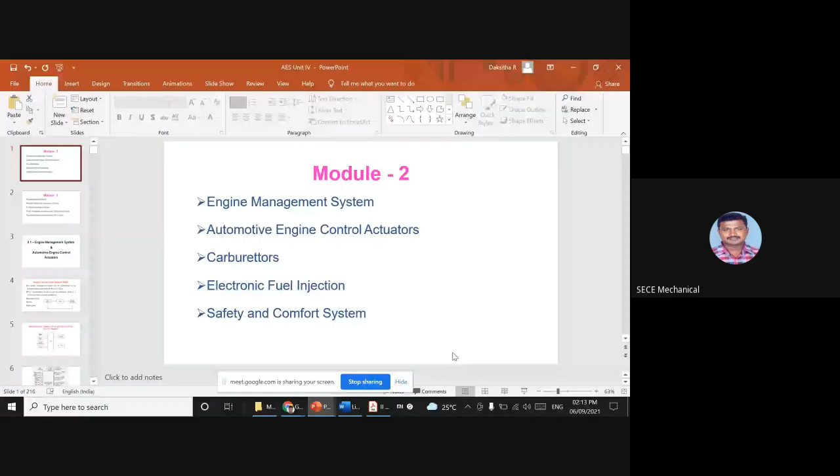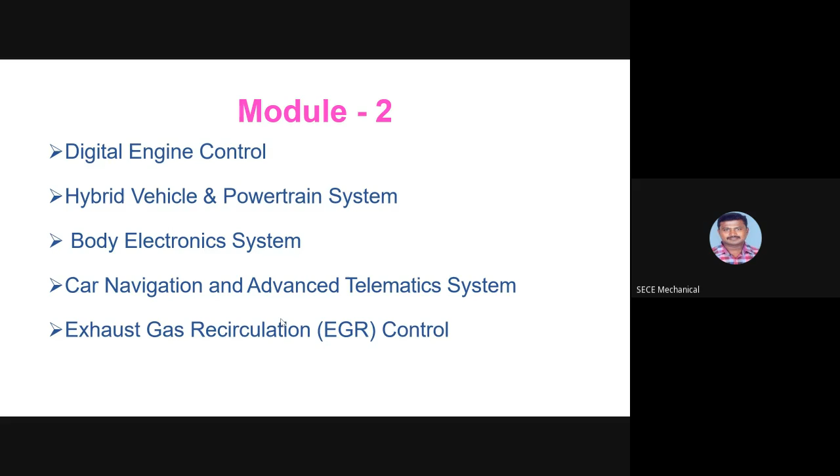Okay, guys. Today we are going to enter into Unit 4. In Unit 4, we are going to discuss the engine management system. So today we are going to get to know your engine management system: the engine management system, automotive engine control actuators, the electronic fuel injection system, the digital engine control system, car navigation and advanced telematic systems, and the exhaust gas recirculation system. Now let us enter into the engine management system.

Okay, nowadays almost 99.99% of cars, every car, is equipped with an ECU, electronic control unit. This electronic control unit plays a major role in controlling the activities carried out in the engine of all automotive vehicles. All the functioning is monitored, and whenever any change is required, this electronic control unit gives commands or orders to the actuators, so that will control the functioning

of the cars. Okay, so the engine management system is one of the smartest systems in today's vehicles, because it controls each and everything in your car or in all automotive vehicles. After all, it is responsible for the entire combustion process and mixing the right air-fuel ratio entering the engine, as well as igniting the compressed air-fuel mixture in the cylinder at the right time.

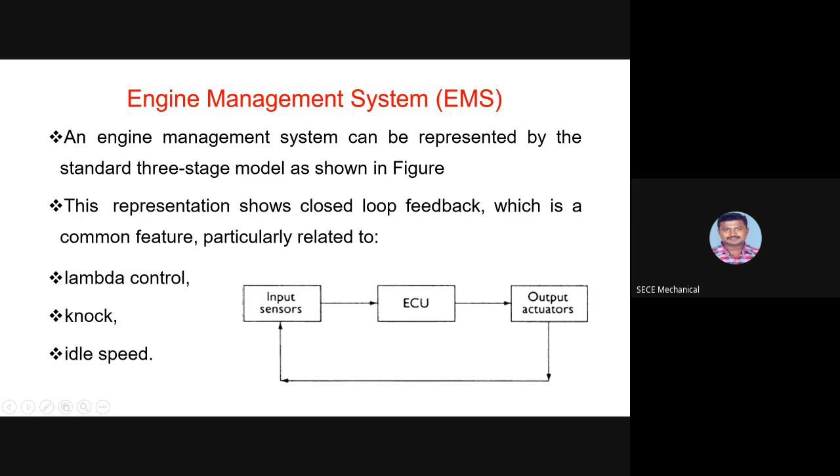So lambda control, knock, idle speed and everything. So this is the general block diagram of an ignition and fuel control system.

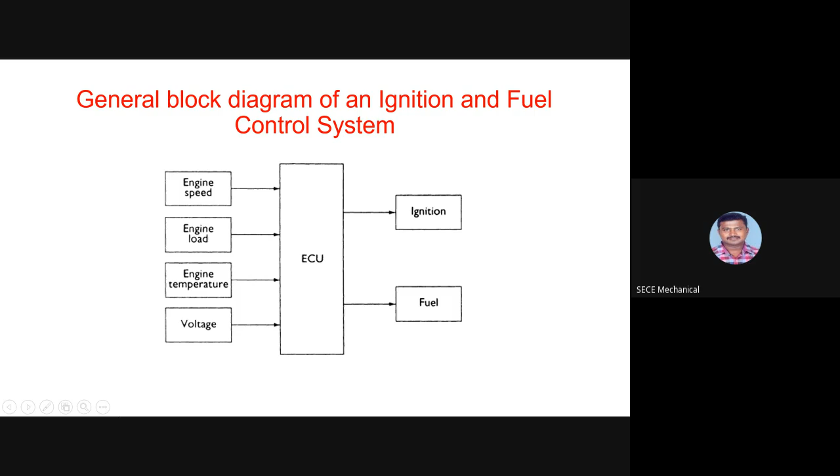In this, on the left side you can see the different types of sensors attached to the engine and in and around the car to monitor the functioning of the car or any kind of automotive vehicle. So here many of the sensors are related to IC engines. So this is going to monitor the IC engines. That is shown in this picture. So you can see the different types of sensors.

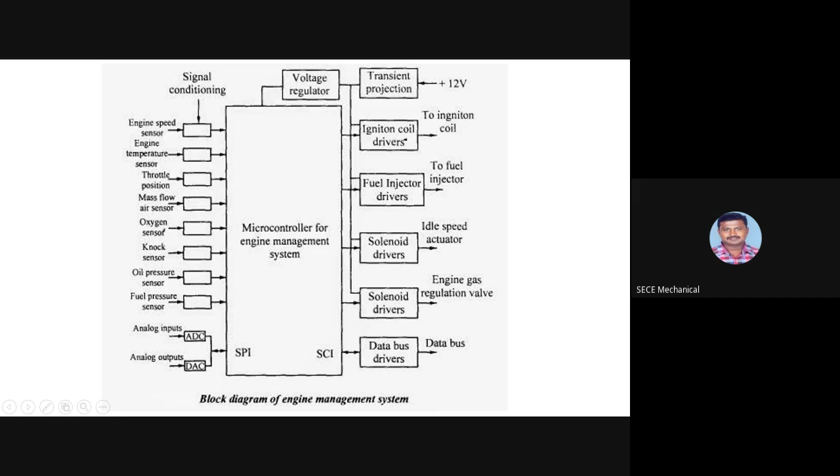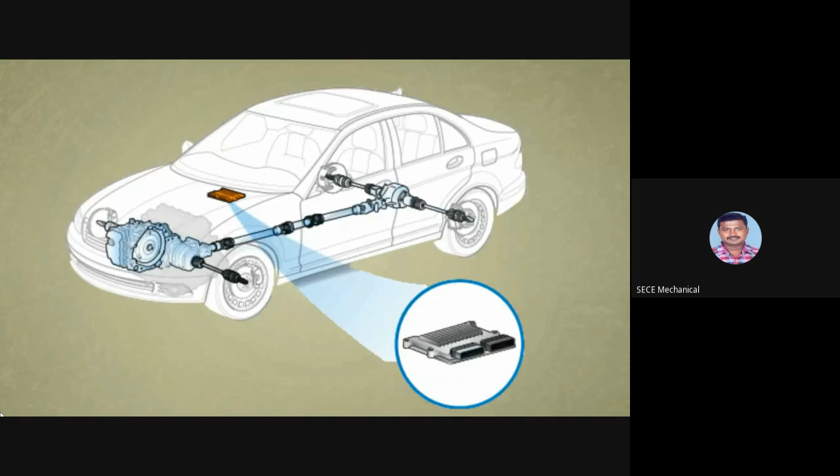Hello viewers. Let's talk about engine control module and its requirement in vehicles. Basically, engine control module is known as powertrain control module or engine control unit. So what does the ECM do? The main function of this controller is to get information from sensors and run certain actuators. The vehicle computer uses these inputs to adjust its settings so the vehicle can run in accordance with your driving habit. Let's know about the connecting sensors, which are playing the important role in ECM.

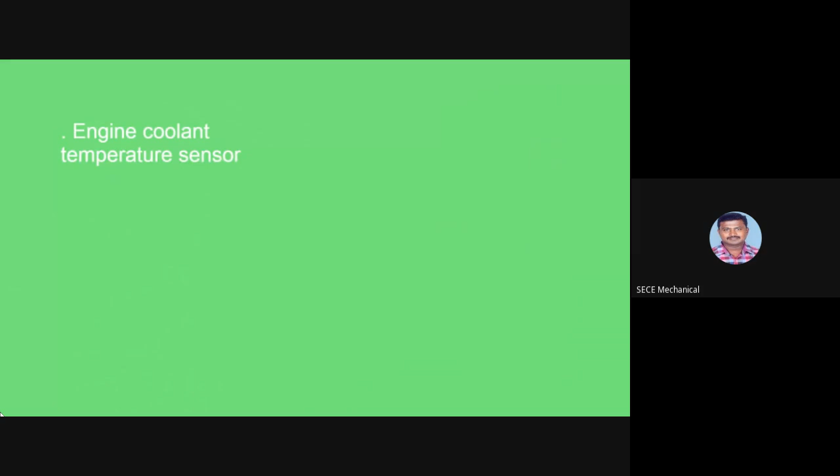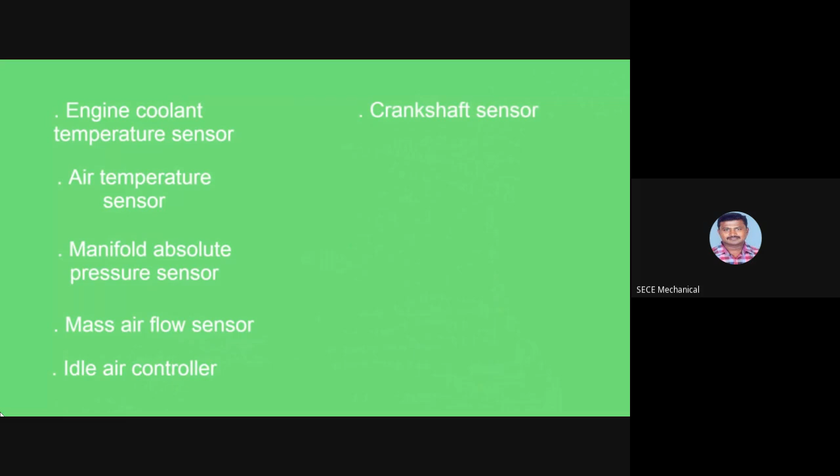Engine coolant temperature sensor, air temperature sensor, manifold absolute pressure sensor, mass airflow sensor, idle air controller, crankshaft sensor, camshaft sensor, throttle position sensor, oxygen sensor, Knock sensor.

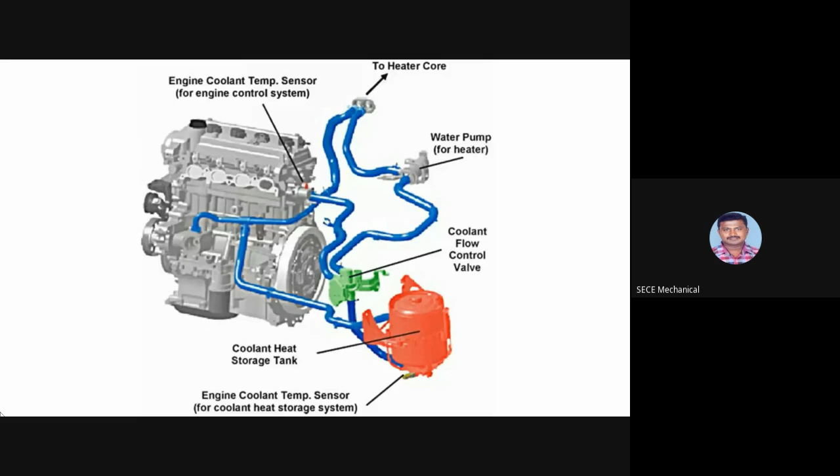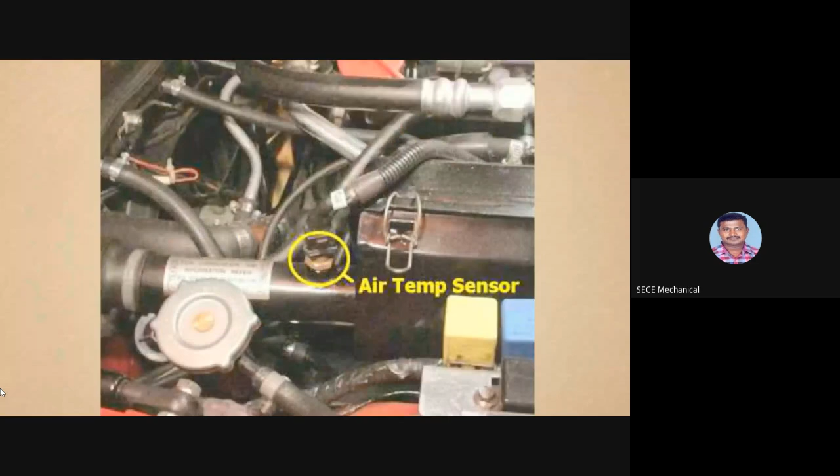Engine coolant temperature sensor. Its function is to instruct the radiator fan to turn on and cool down the liquid after getting temperature above 75 degrees. It is usually located at the bottom of the radiator or top radiator hose towards the engine block. Air temperature sensor. Air temperature sensor monitors the temperature of air entering into the engine. The ECM needs this information to estimate the air density and can prepare a balanced air mixture. It is usually located in the air filter box or pipe that is attached to the air filter box.

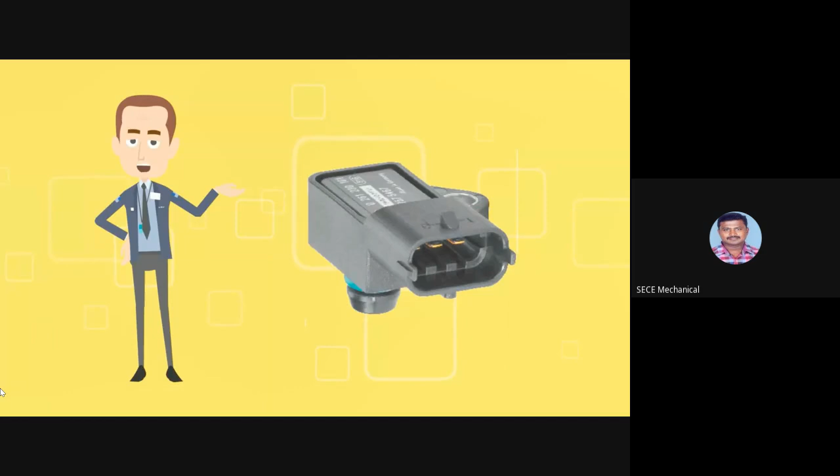Manifold absolute pressure sensor. This sensor is a key sensor because it senses the engine load. This sensor measures air pressure, which tells ECM the current altitude of the vehicle. With the help of this information, ECM can adjust the ignition timing and fuel enrichment. It is bolted on the intake manifold or linked with a vacuum pipe from the intake manifold.

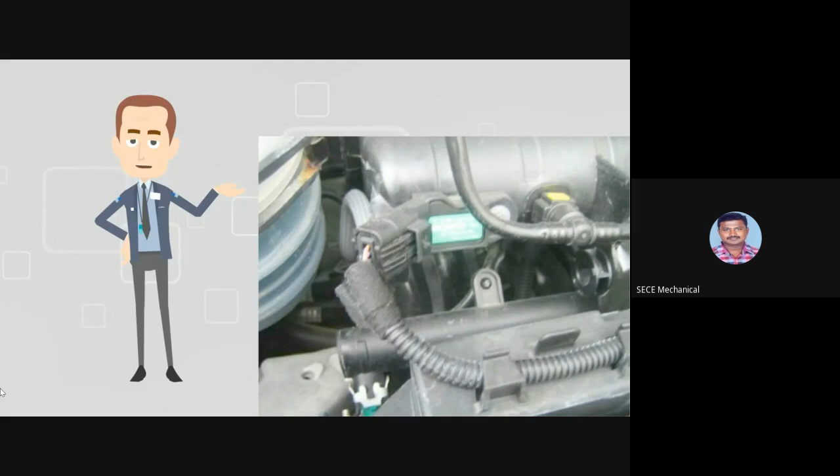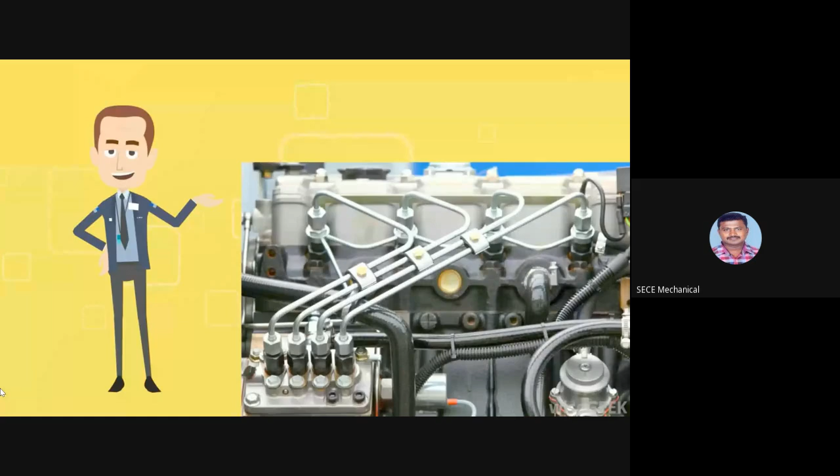Mass airflow sensor. This type of sensor measures the volume of air entering into the engine. Actually, this information helps the ECM to balance and deliver the correct fuel mass to the engine. It produces more current to keep temperature required by the manufacturer. It is located on the air cleaner box. Idle air controller. It works to keep RPM of engine steady. It is an actuator, not a sensor. It increases the RPM of car until the coolant temperature sensor indicates the high engine temperature.

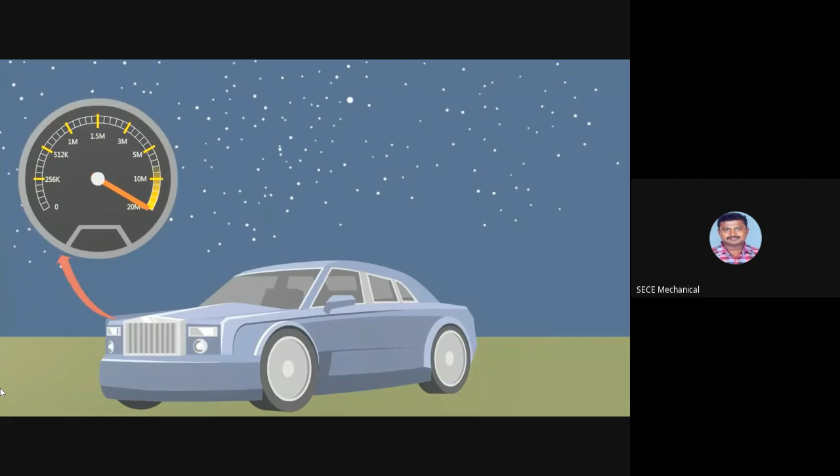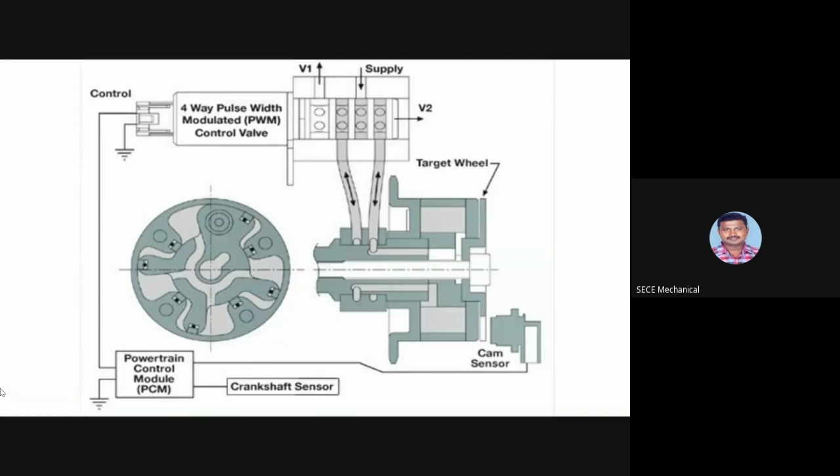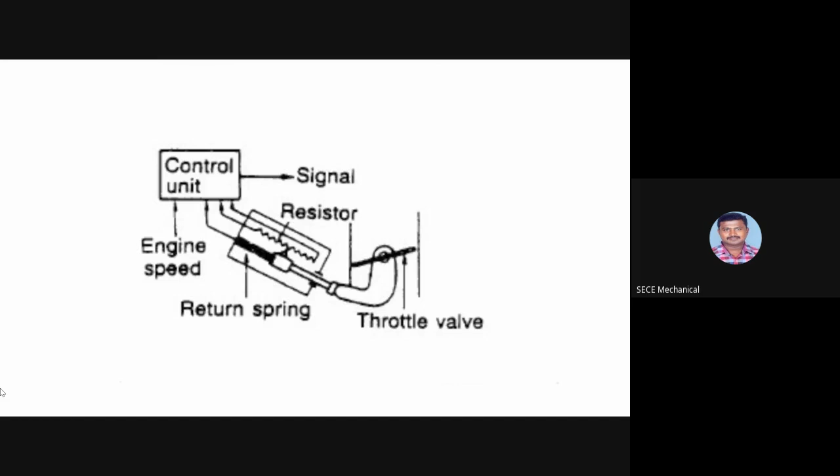Crankshaft sensor. It monitors the position and rotational speed of the crankshaft, and this information is important for ECM to control ignition system timing. Camshaft sensor. It is an electromagnetic sensor which produces voltage when a metal object moves past it. The sensor contacts with ECM for position of camshaft. It is fixed at the end of camshaft. Throttle position sensor. This sensor is linked with accelerator pedal, and the throttle body sends information about injector pulse width and spark timing. It is located in throttle body and it is neither washable nor repairable.

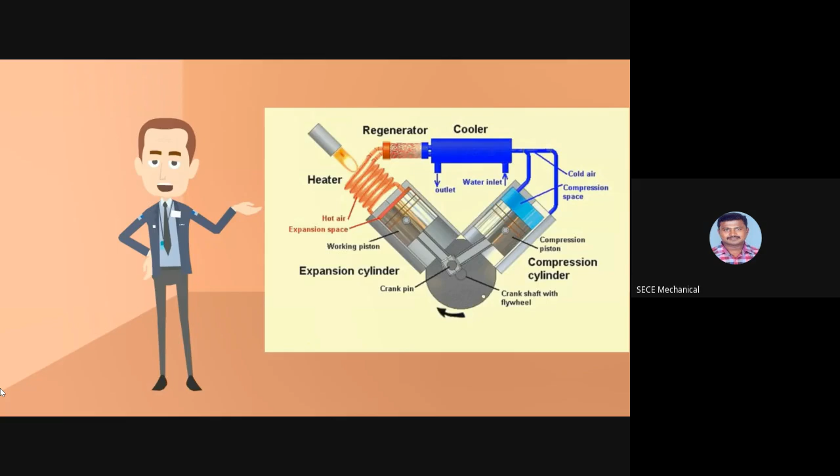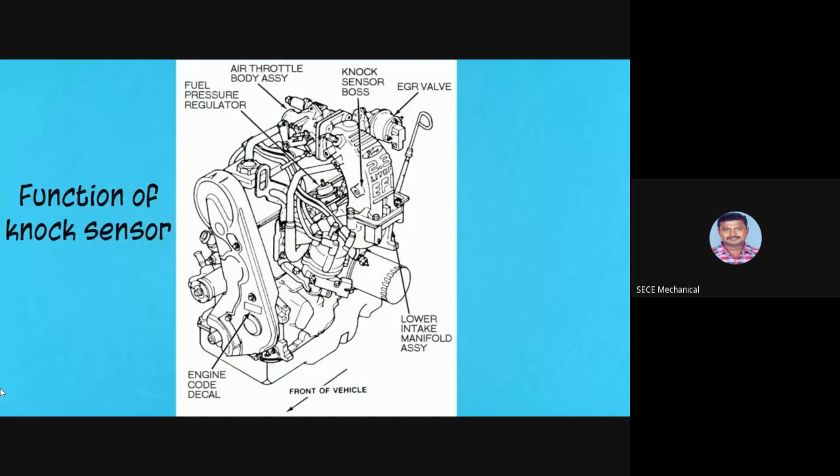Oxygen sensor. It measures the proportion of oxygen in fuel and the amount of fuel consumed by the engine. There are two types of oxygen sensors. One is zirconia and another one is titania. Knock sensor. This sensor contains a crystal that detects mechanical stress and produces a voltage when the car knocks. It also allows different grade fuel without any type of engine problem, and it is fixed in engine body. These are the sensor details.

But question is, what happens when any sensor fails? Well, sometimes sensors simply don't work. So don't forget to repair it. Make sure to repair it or replace it with a new one for better performance.

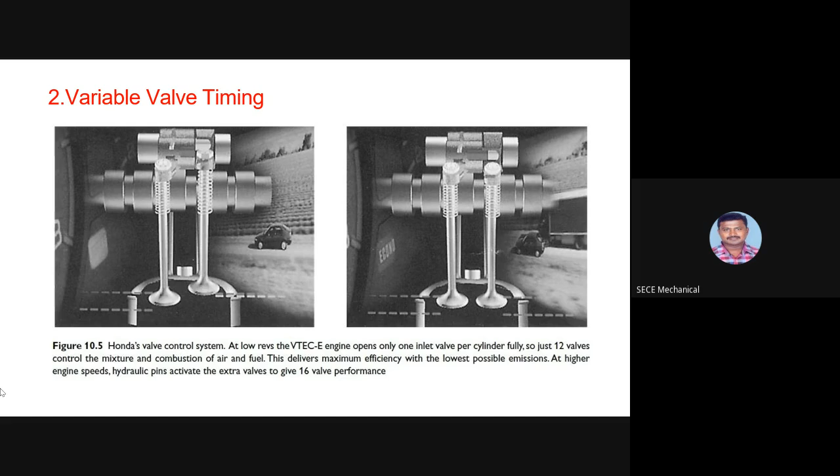During the engine's highest speeds, hydraulic pins activate the extra valves to give 16 valve performance. Depending on the number of cylinders used in our IC engines, the valves are located for each cylinder, and this is not related to hour timing.

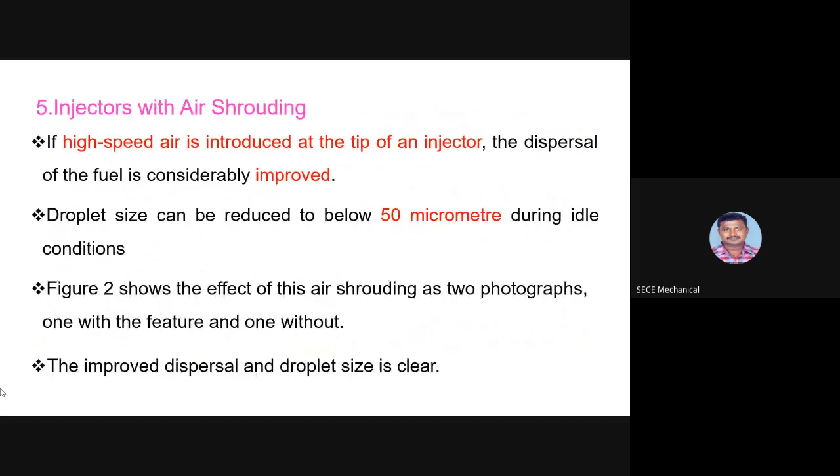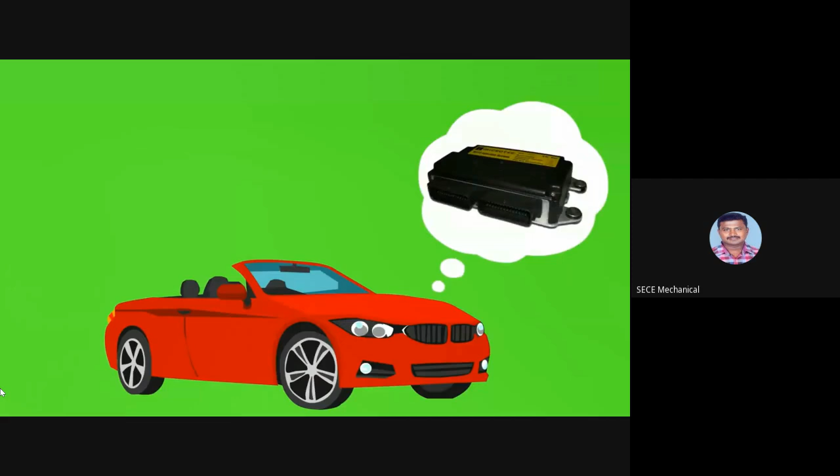Have you heard about the recent technology incorporated in the automotive sector? That is called EMS, Engine Management System. EMS is a type of electronic control unit that controls the running of an engine by monitoring engine speed and ensuring optimal engine performance.

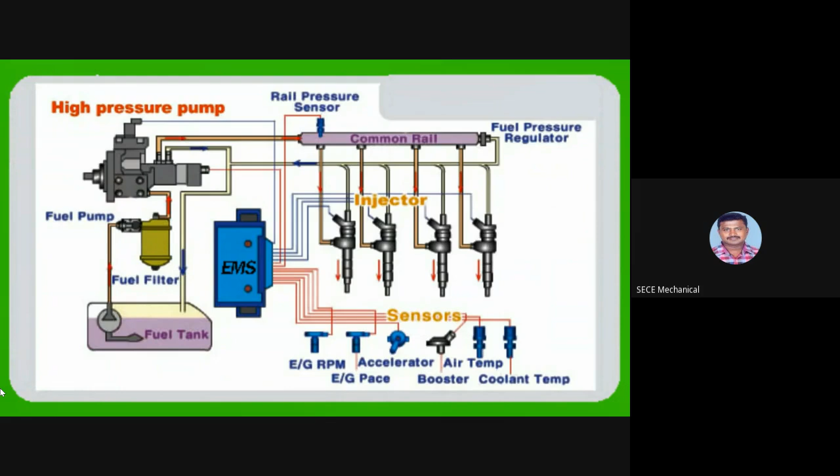Technically, the engine management system is responsible for controlling the amount of fuel being injected and for adjusting the ignition timing. Optimum functioning of the EMS assures maximum engine power, with the lowest exhaust emissions and lowest fuel consumption. It measures the exact quantity of fuel required to start an engine.

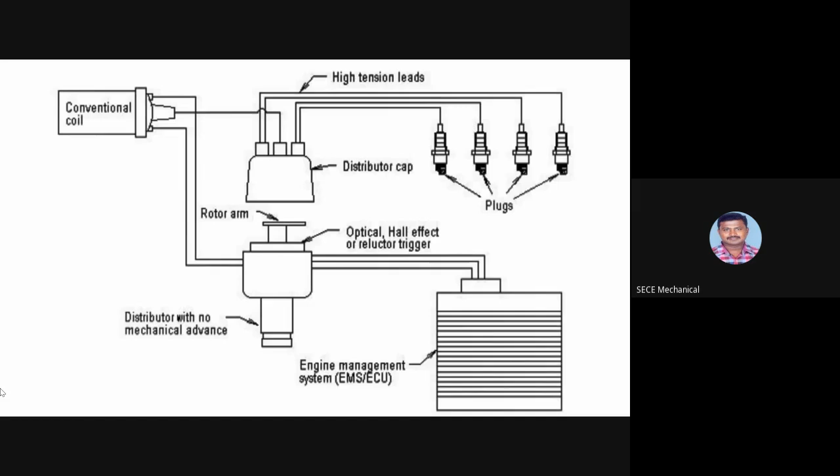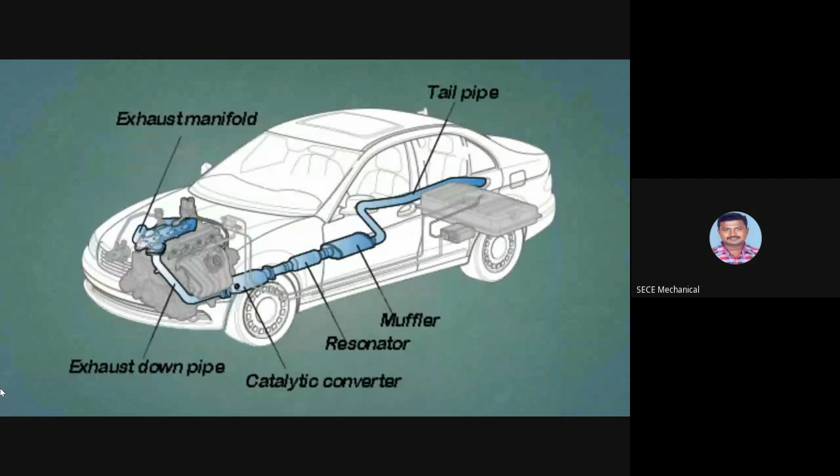Why does a car need an engine management system? It is required to manage the powertrain inside the engine, and it also helps maintain proper coordination with the engine's ignition system, fuel injection system, and emission control. In short, it maintains the right coordination within the engine parts so that it gives better output.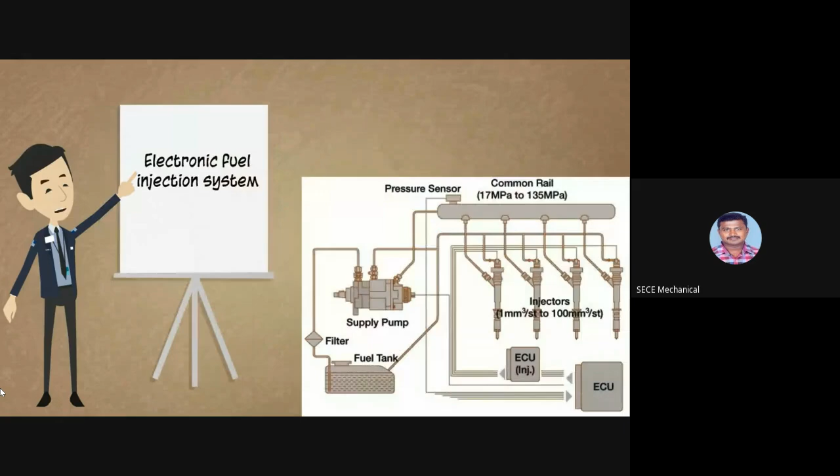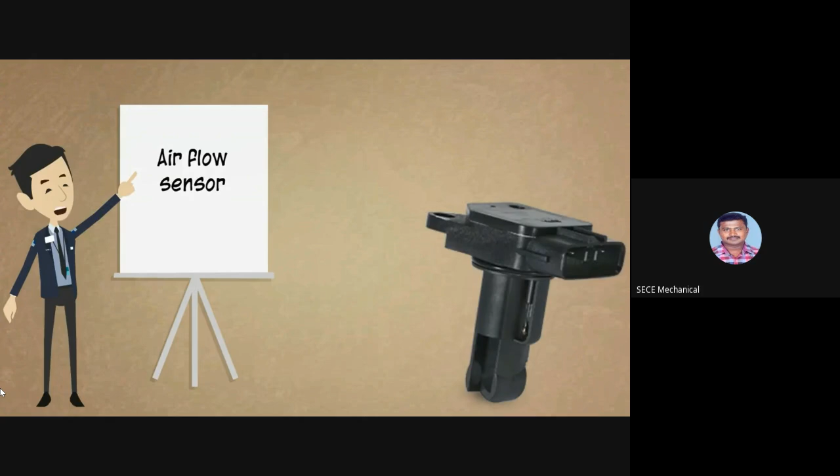Let's discuss the key parts: electronic fuel injection system, air induction system, fuel delivery system, electronic control system, electronic control unit, fuel injector sequential, airflow sensor, air temperature sensor, throttle position sensor, temperature sensor, oxygen sensor, idle air control valve, MAP sensor, knock sensor, engine speed sensor, engine oil sensor, crankshaft sensor, camshaft sensor, and multi-point fuel injection.

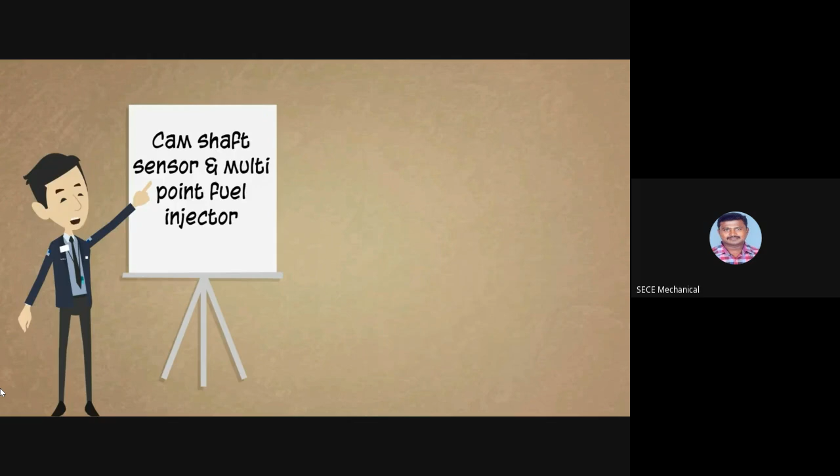First, the electronic fuel injection system. This is the primary fuel delivery system which determines the amount of fuel to be injected into the engine and when to fire the spark plugs. This information helps the engine achieve the most horsepower with the least amount of fuel.

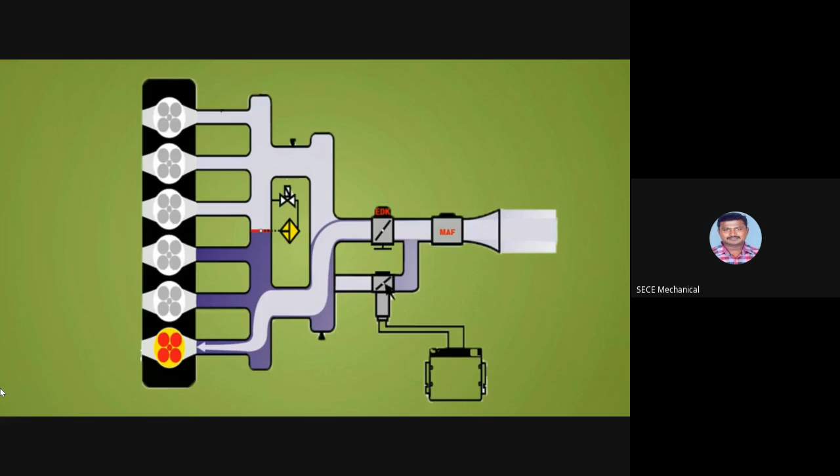The air induction system's purpose is to filter, meter, and measure airflow into the engine. The fuel delivery system helps inject the correct and precise amount of fuel in the intake manifold. It measures the exact fuel efficiency, emission performance, and engine tuning, etc.

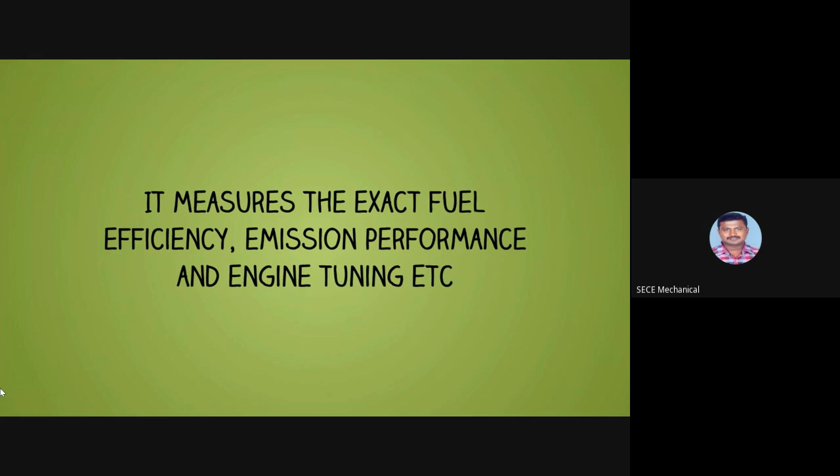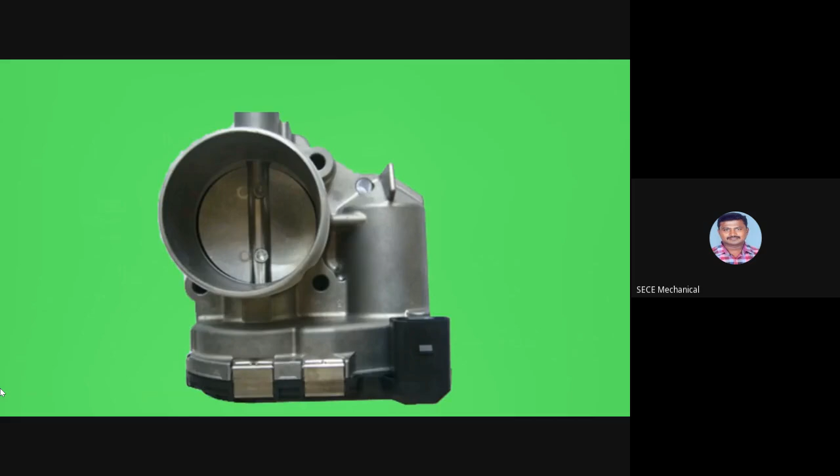The electronic control system's purpose is to detect air temperature, engine temperature, throttle valve opening angle, and the amount of air entering the air induction system, etc. The system controls the correct amount of fuel to be injected and the proper time at which the fuel is injected, at any speed and load condition.

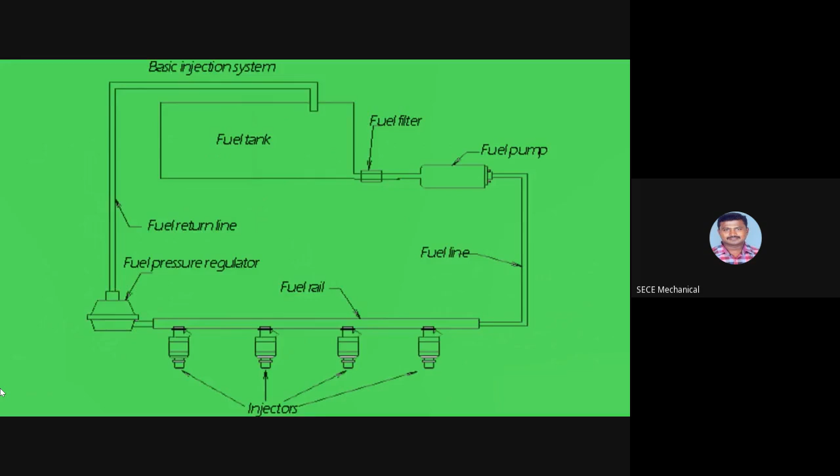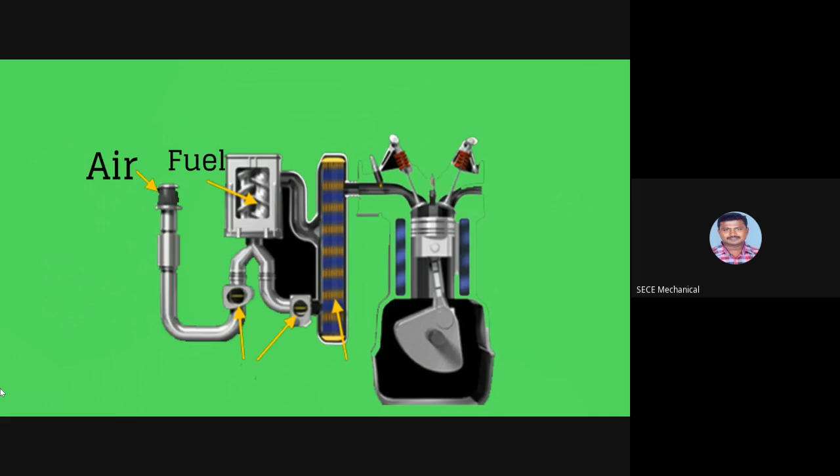The electronic control unit serves as the control center for all the sensors on a car. It controls more than one electric system and subsystem in a motor vehicle, which is why it helps regulate and maintain the amount of fuel and air needed by the engine to increase horsepower. Fuel injector sequential is a type of multi-port injection system.

In this fuel injector sequential system, the injection valve opens just before the cylinder's intake valve opens. It has a fast response time when the driver makes a quick change while driving.

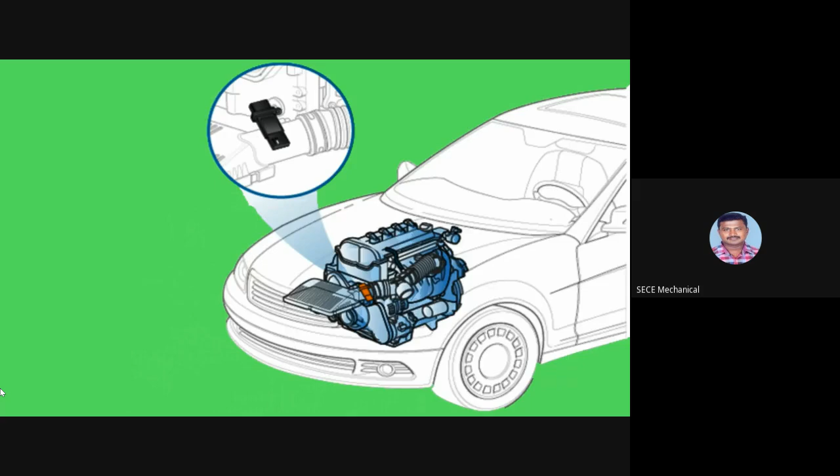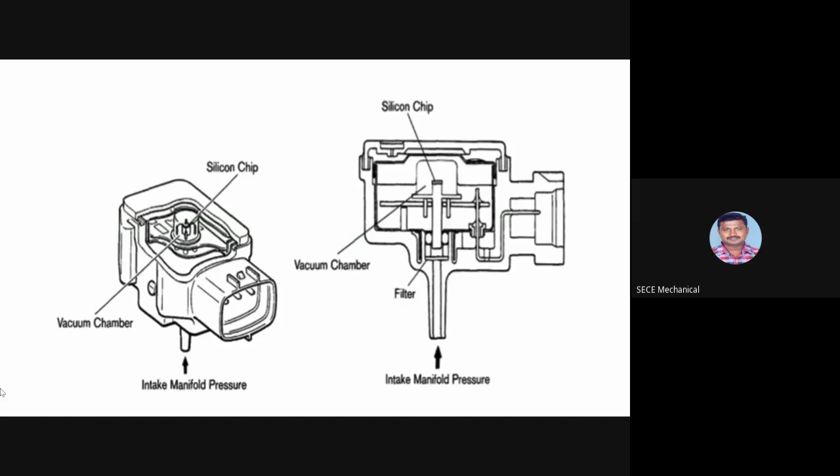An airflow sensor is a device that measures the actual speed of air flowing through the engine in different segments. Generally, it measures the mass of air flowing through the device per unit time. The air temperature sensor helps measure air density for fuel mixture control and to trim the airflow ratio according to the airflow density.

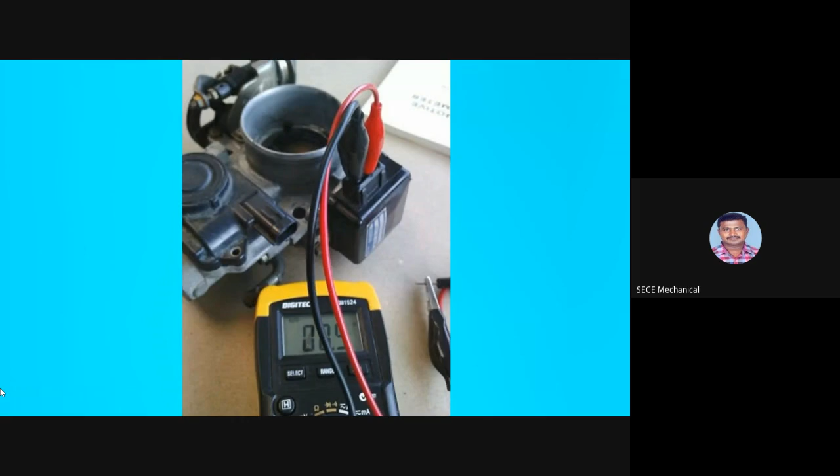Throttle position sensor. The sensor is used to monitor the throttle position of a car. It moves with the throttle and sends a voltage signal to the computer indicating throttle angle and speed of movement. The computer uses this data to measure engine load, adjust timing, fuel delivery, etc.

Temperature sensor. Temperature sensors include analog and digital sensor ICs designed for temperature monitoring of a system. Oxygen sensor measures the proportion of oxygen to fuel in the engine.

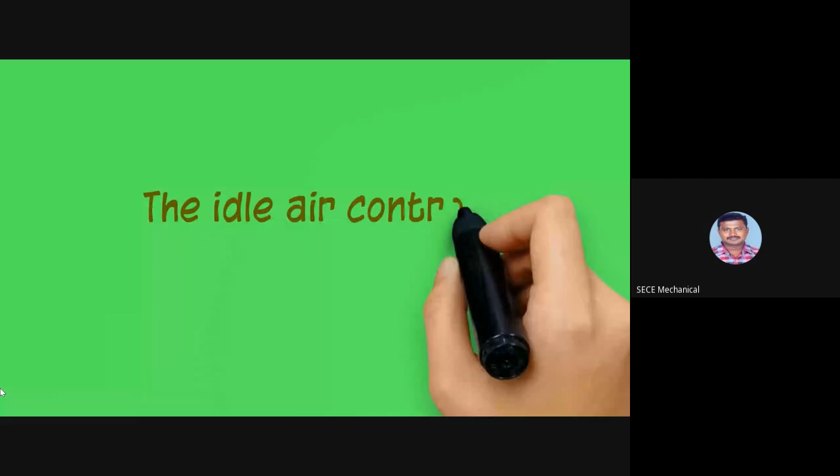The idle air control valve, also known as idle speed control valve, regulates the idle speed of the engine.

MAP sensor. This sensor measures air pressure, which shows engines the current altitude of a vehicle.

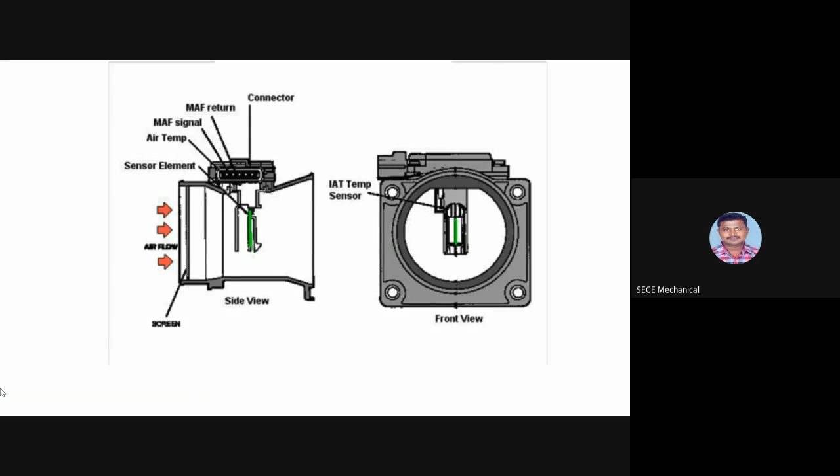knock sensor. The knock sensor detects engine knock and sends a voltage signal to the engine, and the engine uses that signal to control the timing.

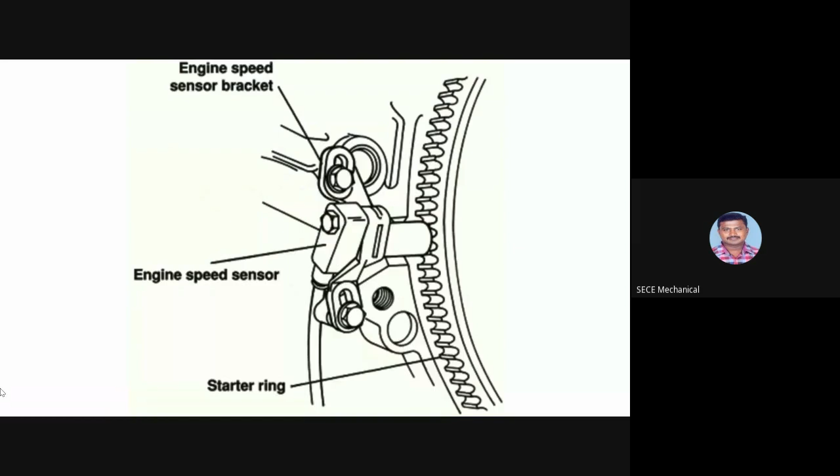Engine speed sensor. An engine speed sensor is attached to the crankshaft of a car's engine, and it indicates the speed that the crankshaft is spinning. This information is beneficial to control both the ignition timing and EMS.

Engine oil sensor measures the oil pressure inside the engine and gives an alert in case of any problem with oil pressure. Crankshaft sensor.

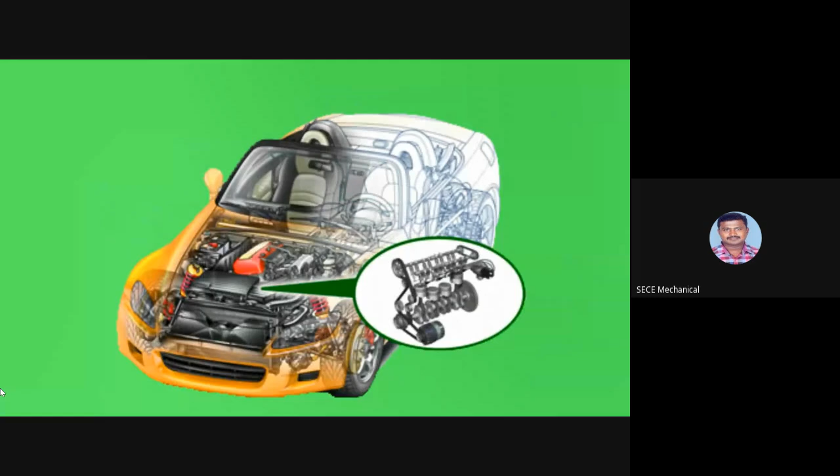It is used to monitor the position and rotational speed of the crankshaft, and this information will be used by the EMS to control the ignition system timing and other engine parameters.

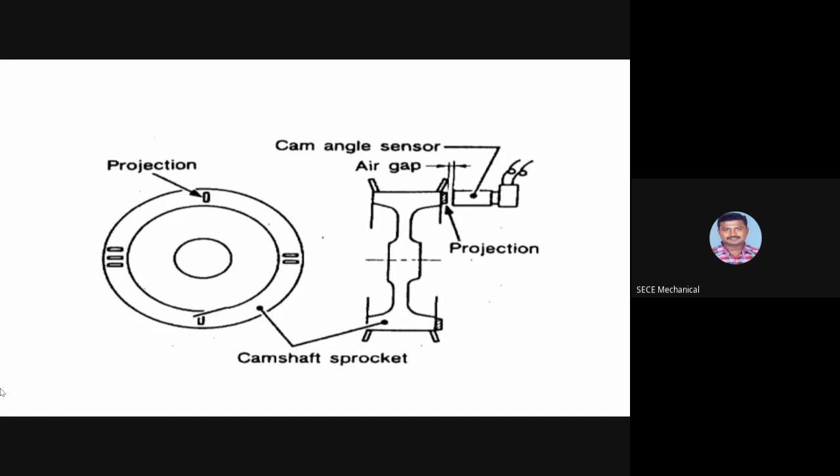Camshaft sensor. The camshaft sensors determine which cylinder is firing to establish injector synchronization and coil firing sequence in DIS systems. The crankshaft sensor sets ignition timing, supplies the RPM signal, and measures the engine speed.

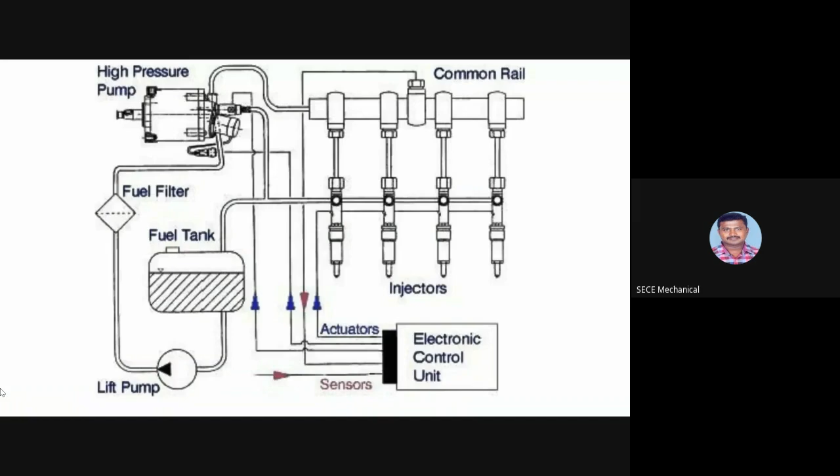Multi-point fuel injection. In MPFI, each cylinder has a number of injectors to spray fuel in the cylinders, as compared to one injector located centrally to spray fuel in the case of a single-point injection system.

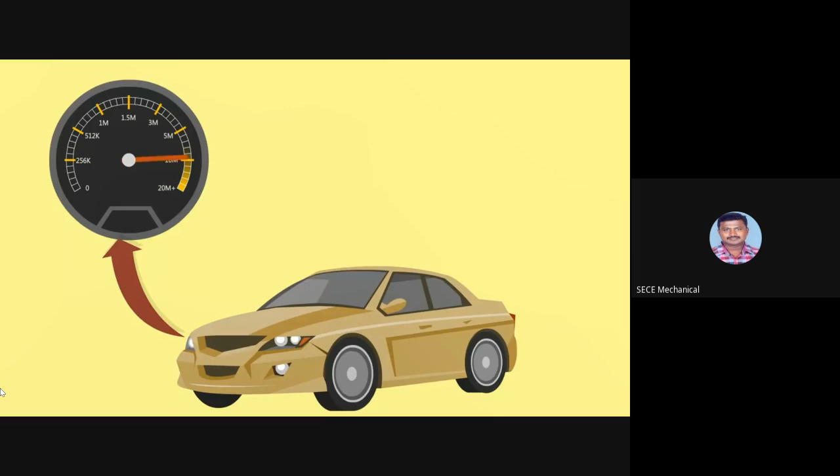Through the use of MPFI, you will find a more uniform air-fuel mixture supplied to all cylinders in your engine, and this uniformity of air-fuel improves the mileage of the vehicle.

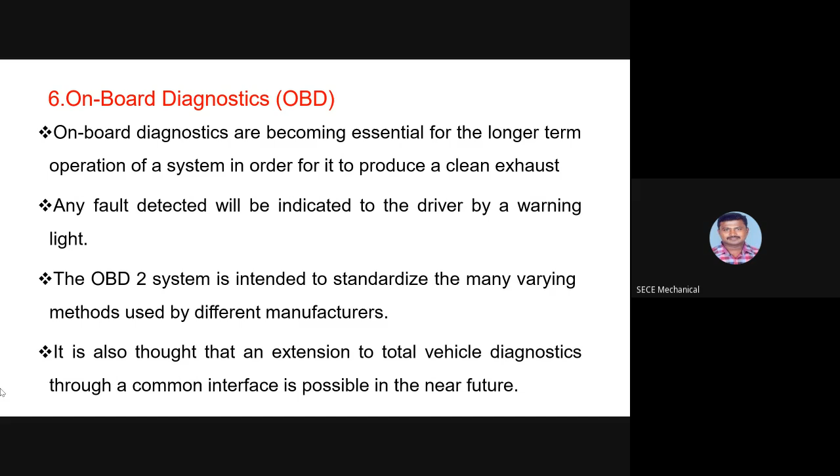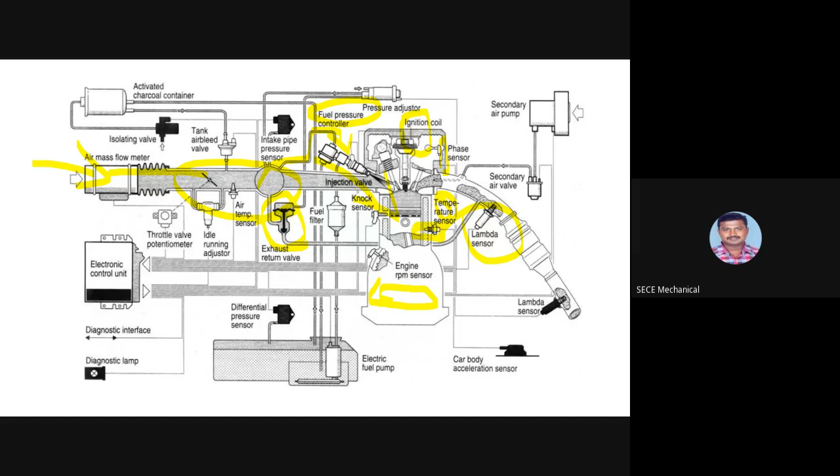But nowadays we are having a fuel injector. The fuel injector will be helpful to inject the fuel at the time of suction, and both air and fuel is going to mix in this area, and that is passed to the combustion chamber when the inlet valve is going to get opened.

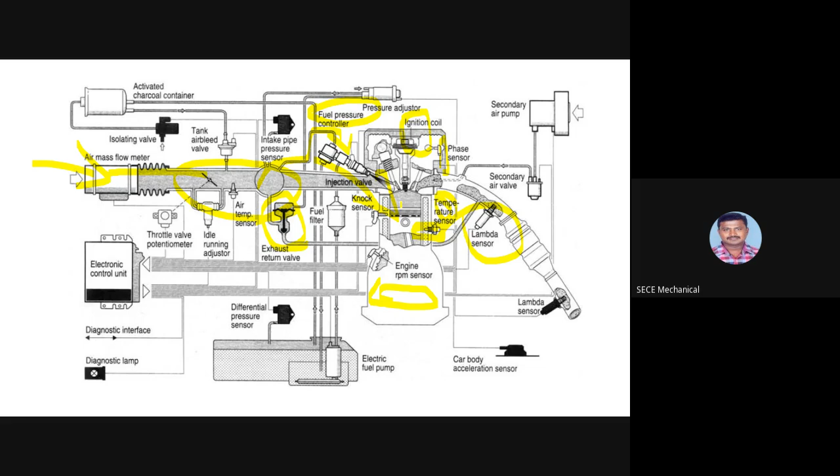Okay, similarly, here also we are using an electrical pump. This will also give some signals, and we have a differential pressure sensor, throttle valve potentiometer, and idling running adjuster.

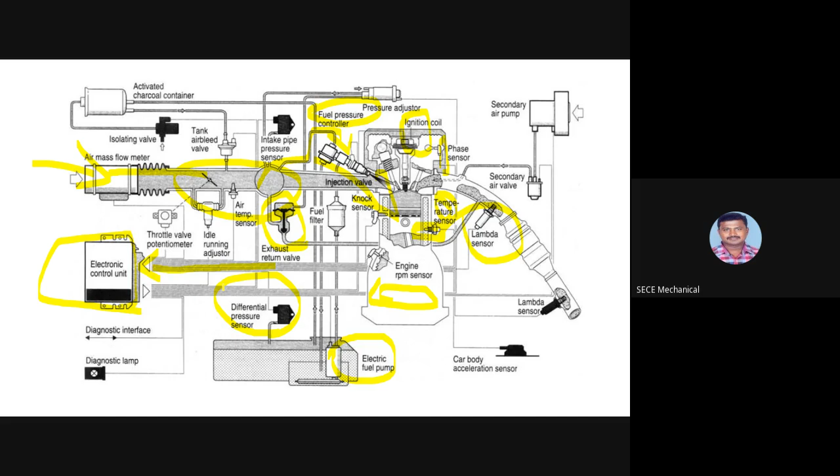So a number of sensors are going to be connected with this electronic control unit. This electronic control unit is very important, and all the data is going to be collected with a number of wires to this electronic control unit, and in case of any wrong data, this will give some signals to the actuators to correct it. So this is what happened.

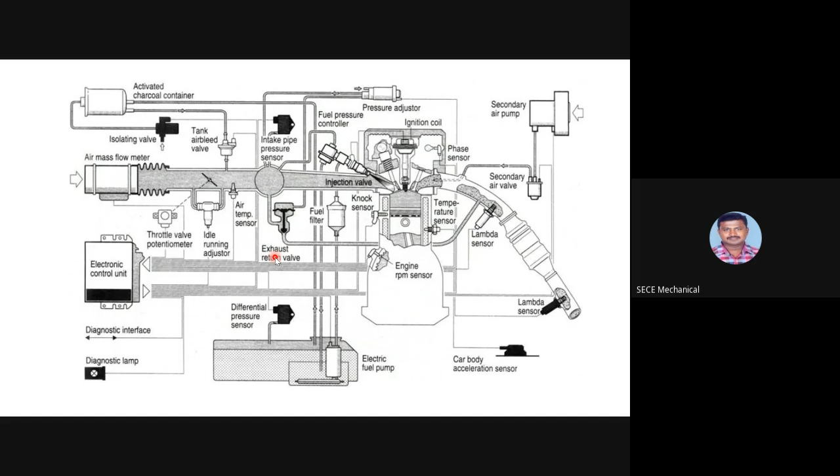So this next video is about the two-wheeler engine management system.

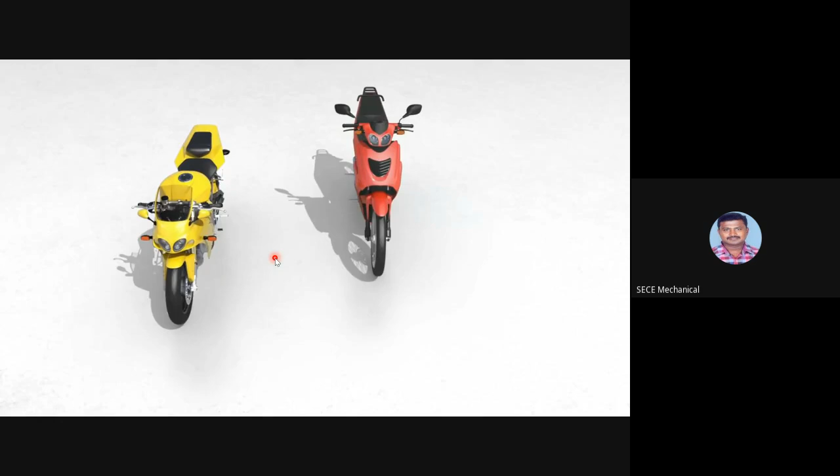Bosch offers a comprehensive portfolio of EMS technology for fuel injection and supply, air management, ignition, exhaust gas treatment, and engine management. The basic system for motor scooters and light motorcycles with air-cooled single-cylinder engines consists of the following components.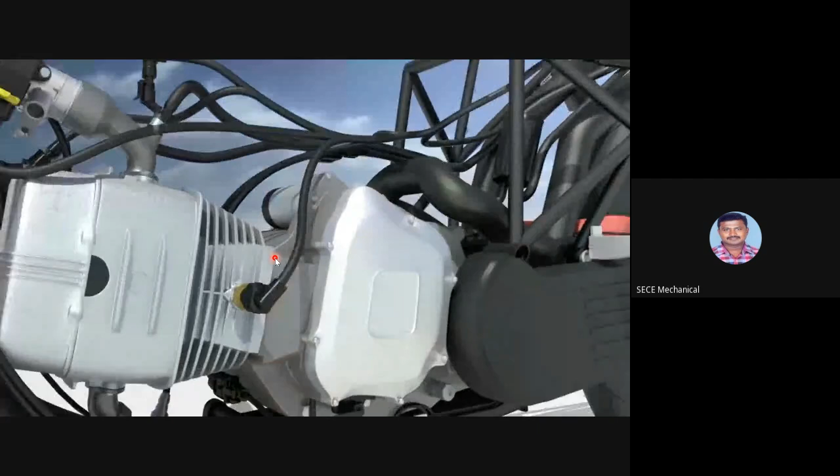The core component is the electronic engine management, which is the central control unit for the fuel injection system. The electronic control unit processes information from sensors, such as the throttle position sensor and the temperature sensor, allowing it to control all system functions, such as fuel supply and ignition, to ensure a clean, economical combustion process in the engine cylinders.

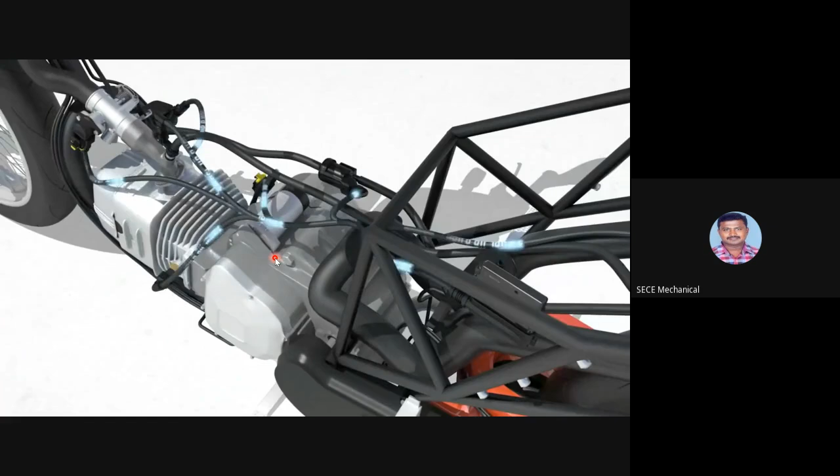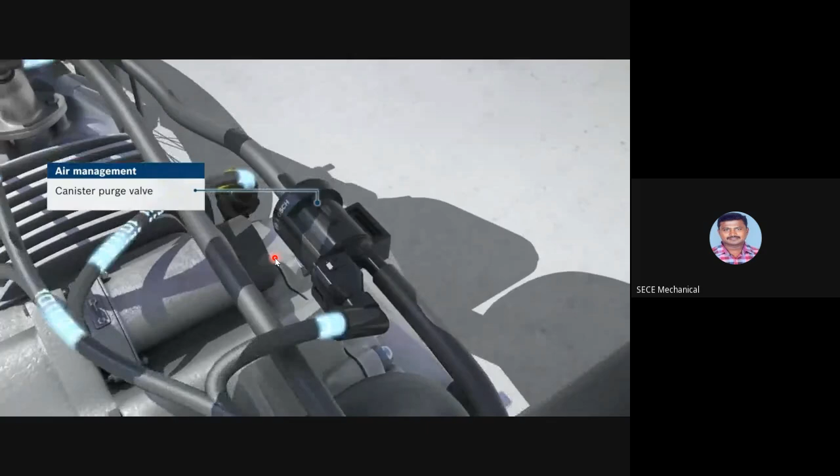The electric fuel pump and pressure regulator ensure that fuel passes from the tank all the way to the fuel injector. The canister purge valve prevents evaporated fuel from escaping from the tank into the environment; fumes instead pass into the intake manifold.

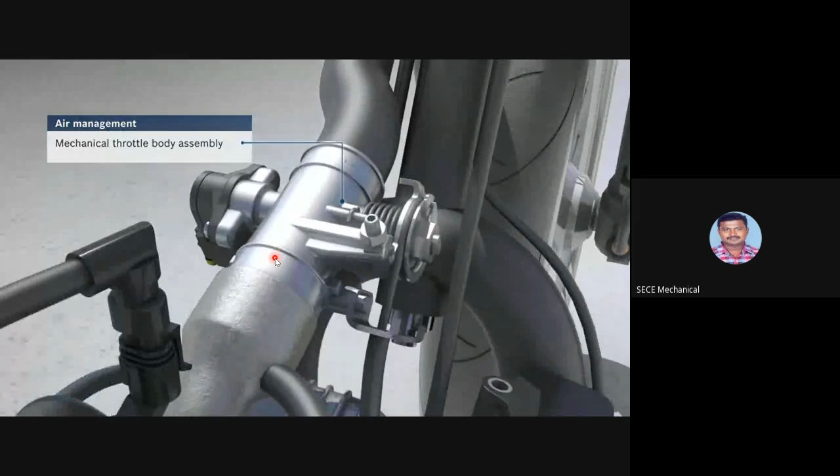The mechanical throttle body assembly enables the rider to precisely configure the air supply. The throttle position sensor measures the angle of the throttle valve, which allows the filling quantity to be determined.

The electronically controlled fuel injector has several ultra-precisely manufactured orifices that achieve precise dosing and fine atomization of the fuel. The air-fuel mixture is processed within the intake manifold and fed into the cylinder for combustion.

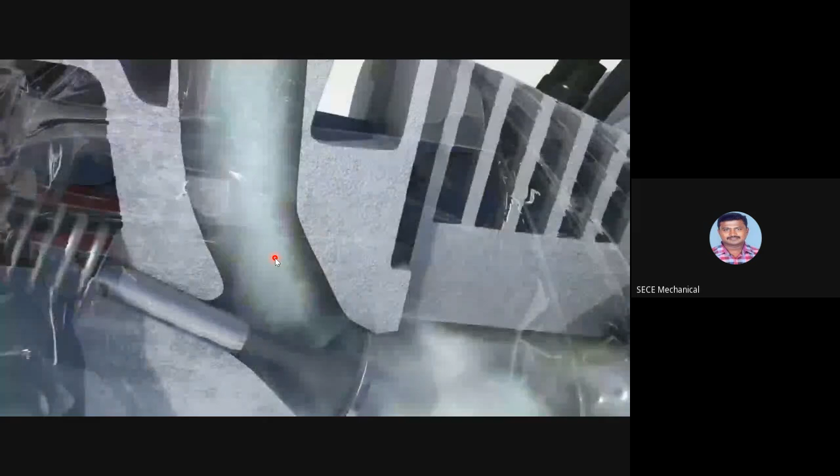Inside the combustion chamber, the spark plug ignites the air-fuel mixture. The ignition coil supplies the required high voltage.

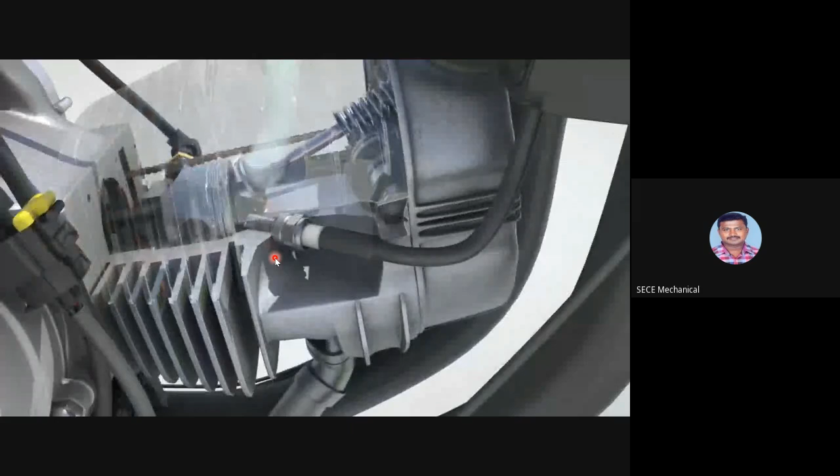The engine management system uses the crankshaft speed sensor, which registers the speed and position of the crankshaft, to control the timing of injection and ignition.

The Lambda sensor supplies the electronic control unit with important information for regulating the air-fuel ratio within the combustion chamber, allowing efficient exhaust gas treatment to be achieved.

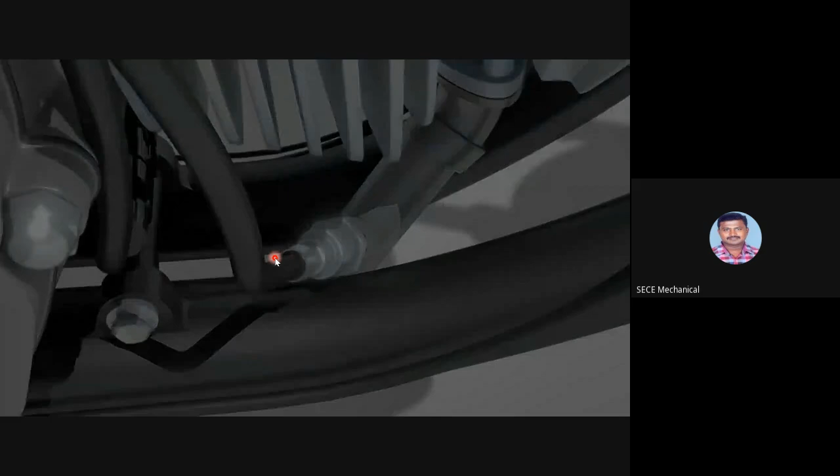For high-performance motorcycles with water cooling, Bosch offers an electronic throttle body with a contactless angular position sensor for position feedback. This allows the engine management system to directly influence the air supply, enabling, for example, additional safety functions or performance adaptations to be realized.

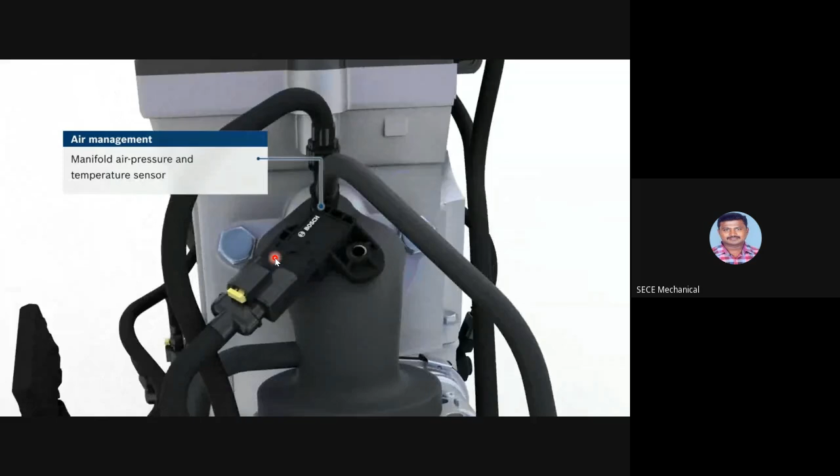A manifold air pressure and temperature sensor in the intake manifold measures the air pressure and the air temperature to calculate the exact air mass entering the engine cylinder. This allows the air-fuel ratio to be controlled with even greater precision.

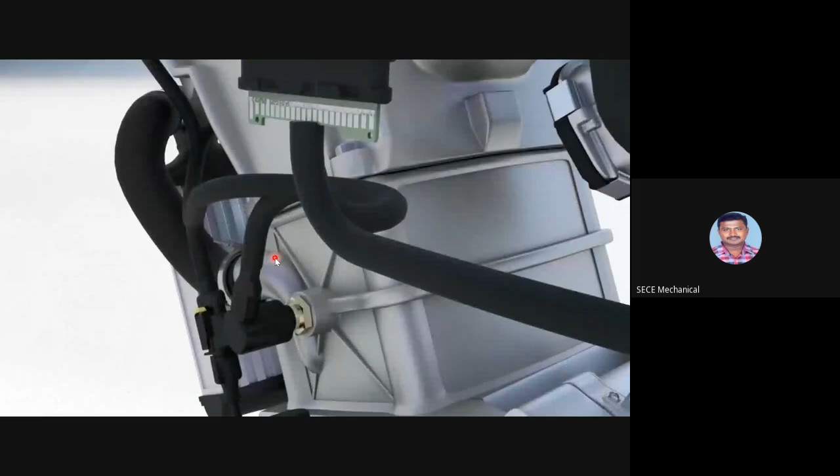For improved cold start behavior as well as better engine cooling and protection, an additional temperature sensor is installed in the cooling water circuit.

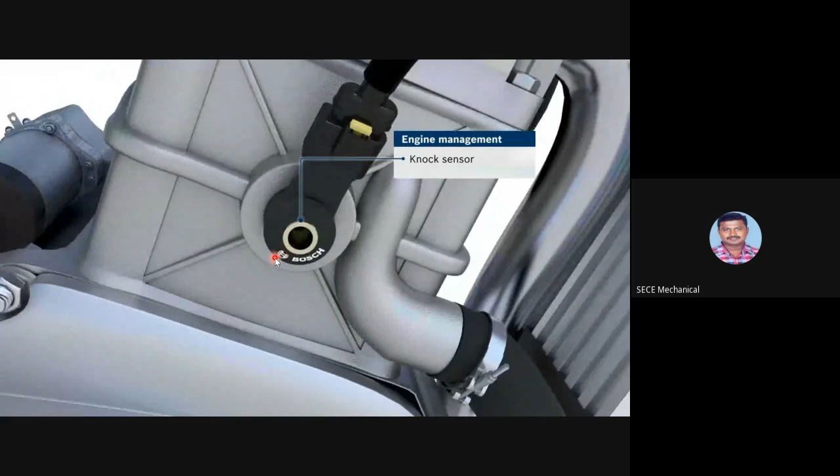A knock sensor provides information about combustion, which is used to optimize the ignition point. This is how the best possible performance for every fuel quality can be achieved.

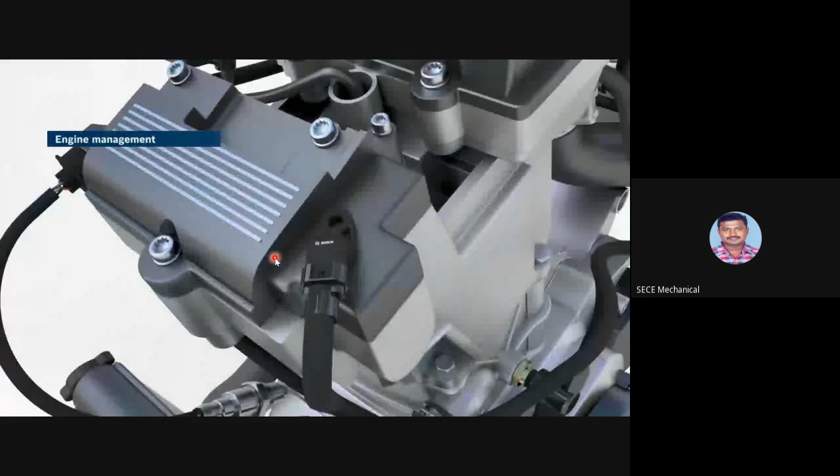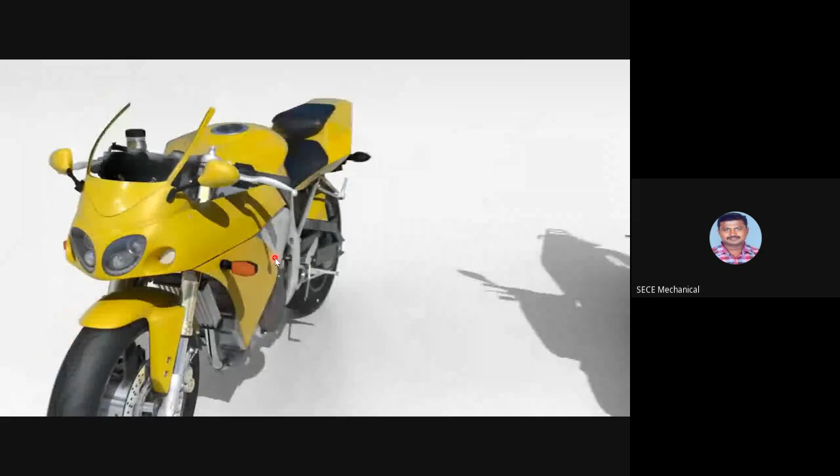A camshaft speed sensor registers the engine's power cycle, which makes it possible to configure the injection and ignition accordingly. Bosch also offers all individual components as integrated EMS complete solutions.

Bosch works in close partnership with motorcycle manufacturers to develop tailor-made EMS solutions for every type of two-wheeler. With a local presence in Asia, Europe, and the Americas, Bosch is familiar with the specific requirements of each two-wheeler market worldwide and offers a broad portfolio of EMS components in proven Bosch quality.

Bosch applies the extensive knowledge and experience it has gained in the automotive industry to Bosch EMS technology for two-wheelers. As a systems provider, Bosch knows exactly what is demanded of each of the various components and how to combine them into a functioning whole.

Bosch will continue to use its innovative power in the future to advance the development of drive technology for two-wheelers. Bosch, invented for life.

Okay guys, I think today you have a better understanding of the engine management system and ECU in automotive vehicles like cars and bikes. I think in this video you have a better understanding of each and every part, how the parts look like and how they work. I think it is very much useful for you, all the videos for your better understanding.